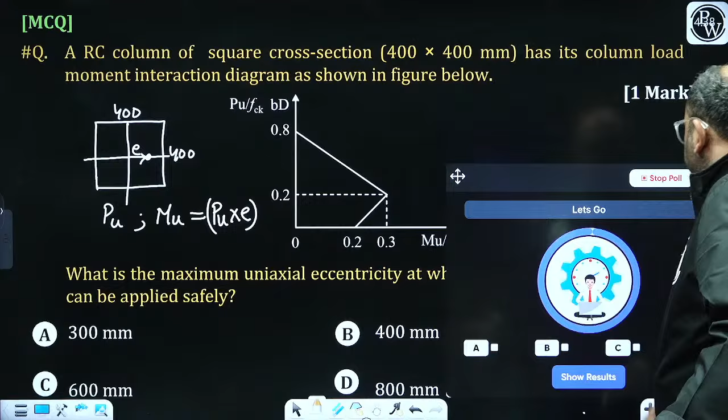So poll, I'm starting with you. It is a multiple choice question. I will be giving you 45 seconds to solve this question. Now the timer has started. Kindly give the answer of this.

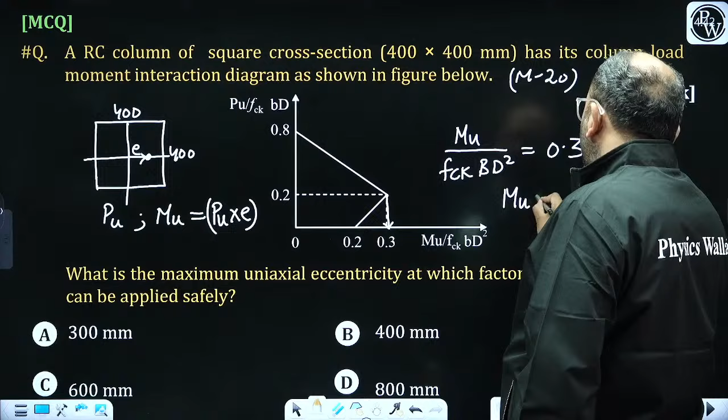Let's see this question. This is a concrete of M20 grade, that is why the answer is given like this, but definitely this has to be mentioned here. So based on this grade, the solution: when I talk about Mu divided by FCK BD square, then the answer is 0.3. So what is the value of Mu? This is 0.3. FCK is 20, B is 400, and D square is 400 square. So based on this, what is the answer coming?

Based on this, what is the answer coming? Anybody? Let me calculate: 0.3 into 20 into 400 into 400. Yeah, so it is coming out to be 384. Mu is coming out to be 384 kilonewton meter.

When we talk about this value, Pu divided by FCK into BD, this value is 0.2. So based on this, 0.2 into 20 into 400 into 400.

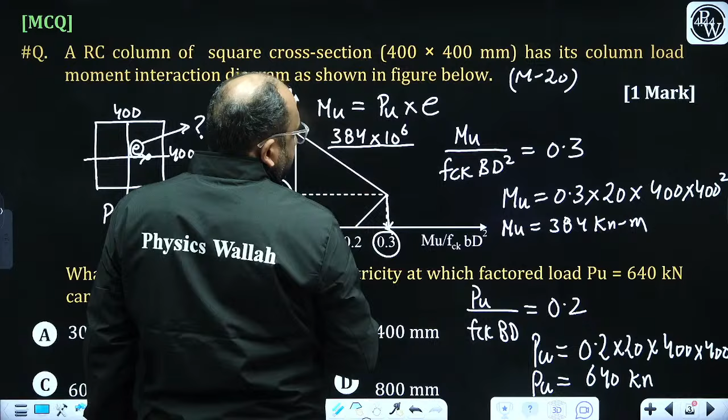Mu is defined as PU into E, correct? Mu value you know, it is 384 into 10 to the power 6, right? This is to be Newton mm, right?

What is the value of PU? This is 640 into 10 to the power 3. This is the value of E.

So the E value will be... E value kitni aayegi? Let's check. 10 ki power 6. Theek hai. So E aa gaya aapka 0.6 meter, that is 600 mm.

So what is the safe eccentricity at which the column is safe? The column is safe when the eccentricity is 600 mm. Are you getting it? Answer is C.

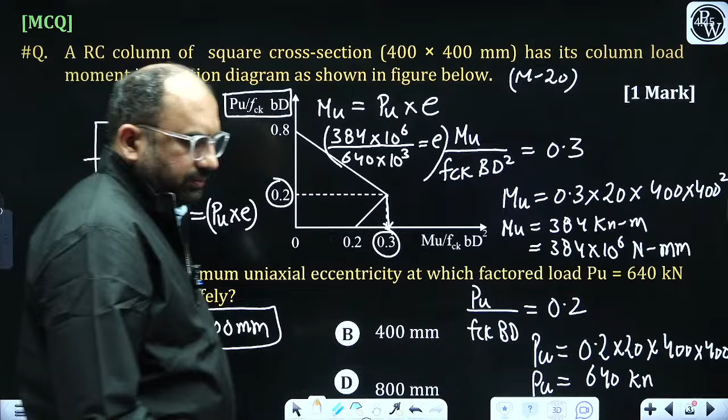Correct. Done. I hope this question is clear. Any doubt anybody is having?

This question is from the topic called column and eccentric load. You can read this topic, and this is by LSM.

So by LSM, when you're solving the question of column for the eccentric load, this is called the interaction curve. This is used, right?

Moving forward, again the MCQ based question. This is of 2 marks. So tell me what is the right answer for this? Tell me what is the answer for this?

So first of all, I would like to check how many people have given the right answer. So this answer was C, and 5 students answered correctly. Good. Now, what about this question?

This is a question regarding the longitudinal reinforcement of the column. Tell me what is the right answer for this? Giving you a time to solve this question.

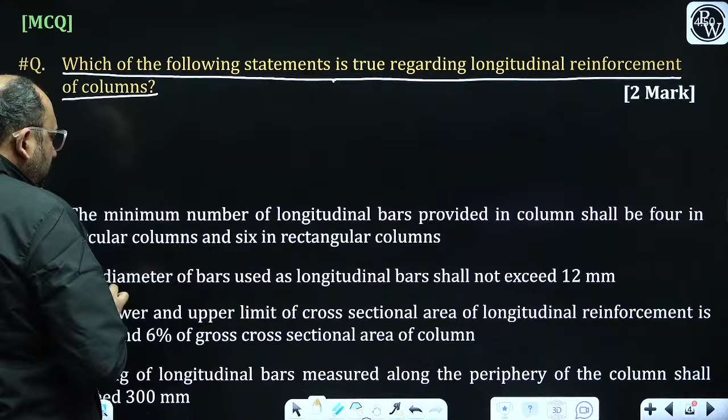Listen carefully. The minimum number of longitudinal bars provided in a column shall be 4 for the circular column, and it shall be 6 in a rectangular column.

So based on this question, the first option states that in a circular column, the recommendation says the minimum number of bars to be provided for the circular column should be 6, and for the rectangular or the square column it is minimum 4. So here in this question the option given is wrong. So therefore this one is wrong.

Based on the second option, the dia of the bar used as a longitudinal reinforcement shall not exceed 12 mm. But based on the recommendation, the dia of the main bar in a column should be equal to or greater than 12 mm. So this statement is again wrong.

Again wrong. Now the lower and the upper limit of the cross-sectional area of the longitudinal reinforcement is 0.8% and 6% of the gross sectional area of the column. What I say is this option is certainly correct.

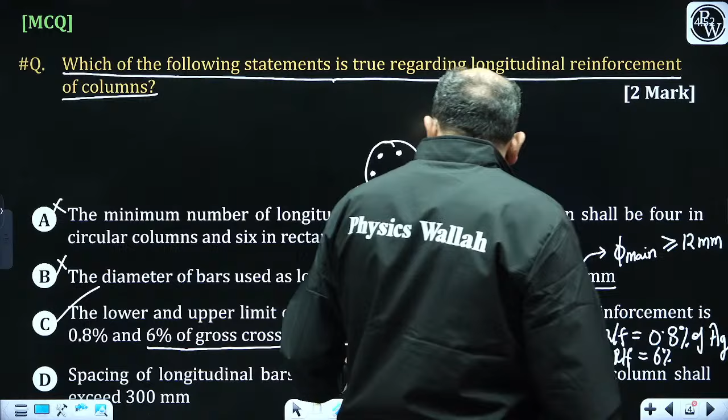So when the lapping is not provided in a steel reinforcement, then it is 6%. So certainly it's correct. The spacing of the longitudinal bars measured along the periphery of the column shall not exceed 300 mm. This is also correct. Right? This is also correct.

Now tell me, how many of you agree with me that option number D is correct or wrong? The first two options are incorrect. The third option is correct.

How many of you agree that the D option can be correct, or what you say, is it incorrect? Spacing of the longitudinal bar measured along the periphery of the column. So tell me, maximum spacing of the longitudinal reinforcement.

Not along the periphery - that measurement is wrong. So if this is a bar, the spacing between center to center of the bar is measured, not the periphery. Right? So this is maximum. Are you getting it? We are talking about center to center distance.

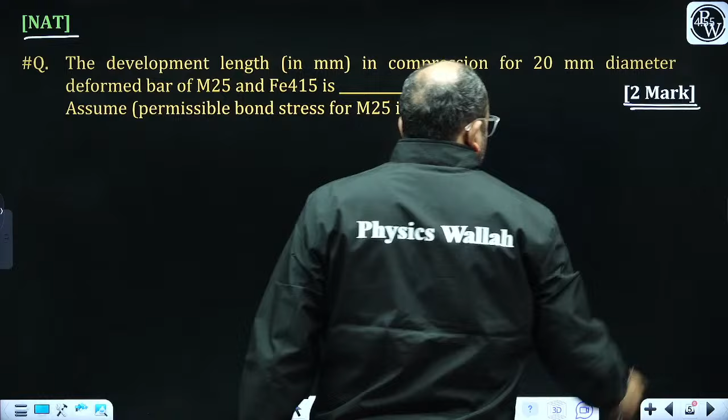It is a NAT based question, numerical ability test based question, again of 2 marks. So let's have a poll for this question. It is an integer type question. I'm giving you 60 seconds to solve this question. Kindly answer this.

Have you solved this question?

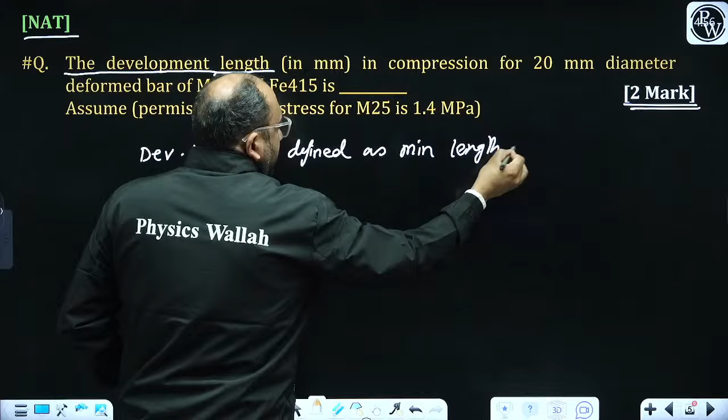So what do you mean by the development length? Development length is defined as the minimum length of steel embedded in column or in concrete, such that bond strength between steel and concrete is equal to tensile strength of steel. Correct? Is it?

So when we talk about the development length, what is the development length? After derivation, it comes out to be 4 into tau BD permissible. Is it? This is the formula for the development length. Are you getting it? Clear?

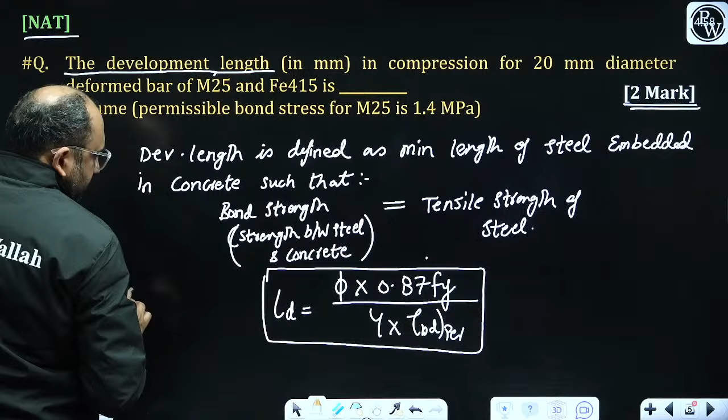So based on this formula, we need to check: the dia of the bar is given, find the development length in mm in compression for a 20 mm dia deformed bar. Listen, two notes are there. You need to consider that the tau BD permissible value is increased by 60% for HYSD and CTD bars, and this is available in these two grades, right?

Second is tau BD permissible value is increased by 25% for compression steel. Clear?

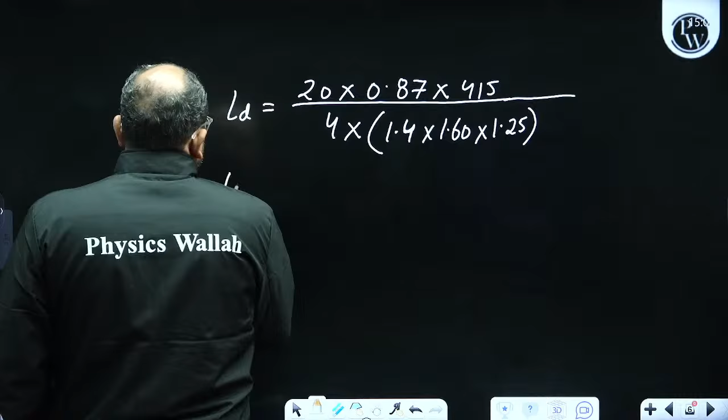Now this value has to be increased by 60% since the bar is HYSD, and since we are determining the development length for the steel in compression, the 25% is further increased for the compression steel. So based on these results, you can calculate the development length. This is coming out to be how much?

644.73 mm. This kind of question is very important. This is the answer. So here you can write 644.73 mm. I hope this is clear to everyone. Let me check how many people have given the right answer for this. So the answer is 644.73.

Okay, anyway, moving forward to this question. Now how many of you can give the answer for this? This is again an MCQ based 1 mark question: Take the Young's modulus of elasticity of steel given for Fe415 grade of steel. The ratio of compressive strain to tensile strain for the balanced singly reinforced section will be?

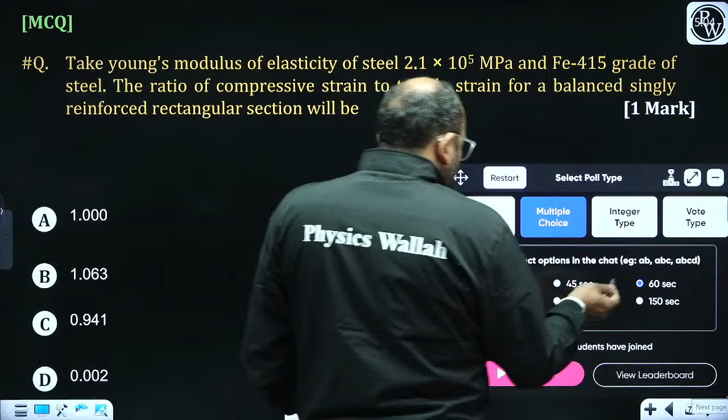So again I am starting the poll and you are supposed to answer. It is a multiple choice question. I'm giving you 60 seconds to solve this question. Kindly solve this. Give the answer.

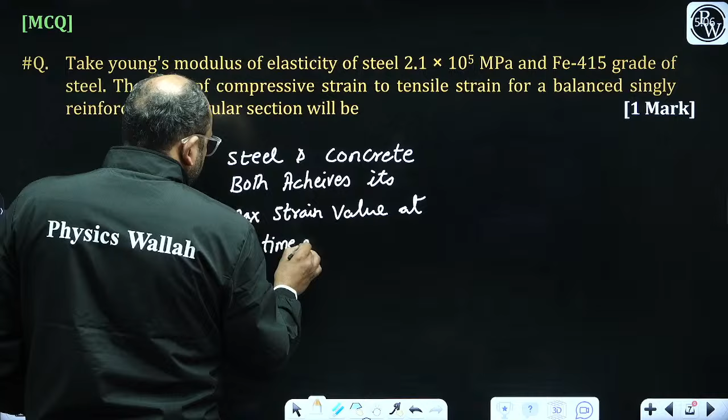Simultaneously, this happens when the beam is a balanced section, or I can say the limiting section. This happens in a limiting section.

So at the time of failure, the strain in steel is 0.87 Fy divided by Es. At the time of failure, the strain in steel has to be greater than this. So just before failure, the strain will be equal to this.

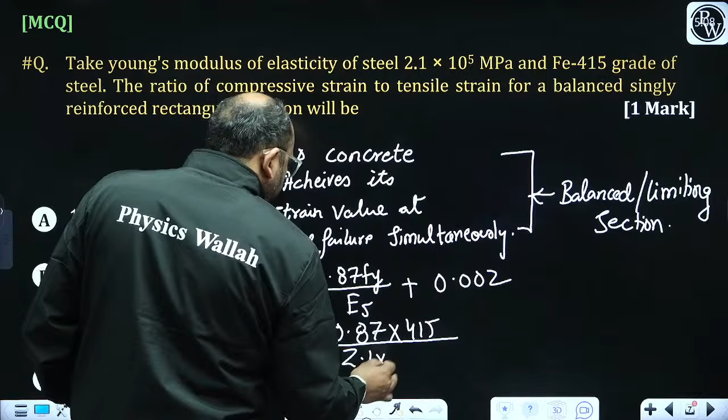So 0.87, what is the value of Fy here? It is 415. What is the value of Es here? It is 2.1 into 10 to the power 5, plus 0.002. What is the value coming out to be? Give the answer. It's 0.0037. Yeah, correct. Okay, great.

What is the strain in concrete? The maximum strain in concrete at the time of failure is 0.0035. In this question, they are asking the ratio of the compressive strain and the tensile strain. Obviously this is the compressive strain, because the concrete strain we are talking about is compressive strain, and the strain in steel is tensile strain.

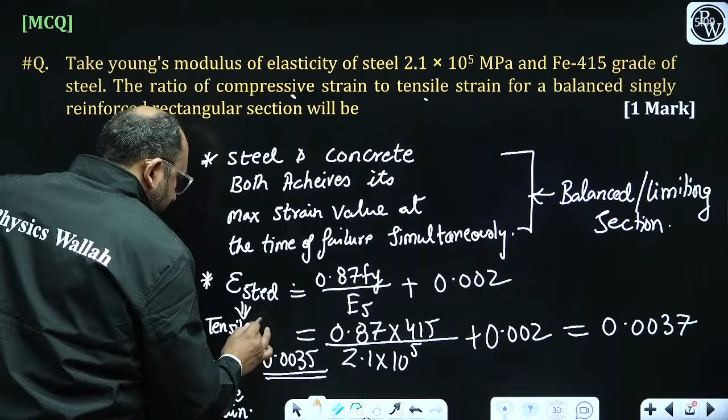So the ratio of compressive to tensile strain, right? So the ratio you can determine. What is the ratio of strain? The question is asking for E, and this is this. So 0.0037 divided by 0.00...

What is the value? Value is how much? 0.941. Is it the answer? Answer is C.

Tell me, is it clear or not? Is it clear or not? Swagatham, why are you saying it is? Okay, now correct. Yeah. Done.

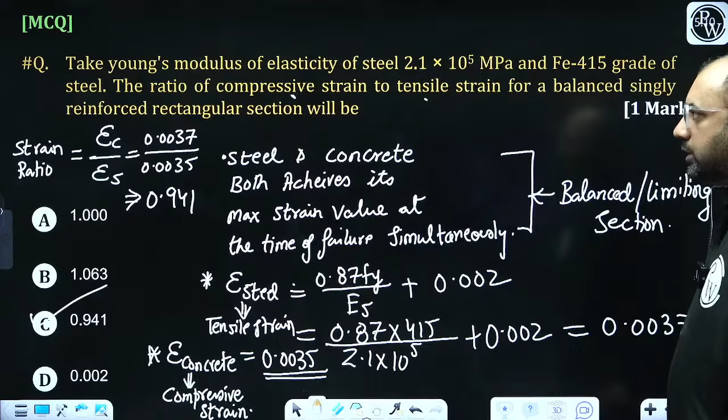Clear? This question I hope is clear to everyone. Good question, this type of question can be asked, so I will be writing it as an important kind of question. Again, the last question I solved is also important because many times this kind of question is asked.

So, okay, moving forward. Now this is a question in front of you. Again, it is an MCQ question, but this time this question is of 2 marks. You are supposed to answer this question. So first of all, yeah, it is a multiple choice question.

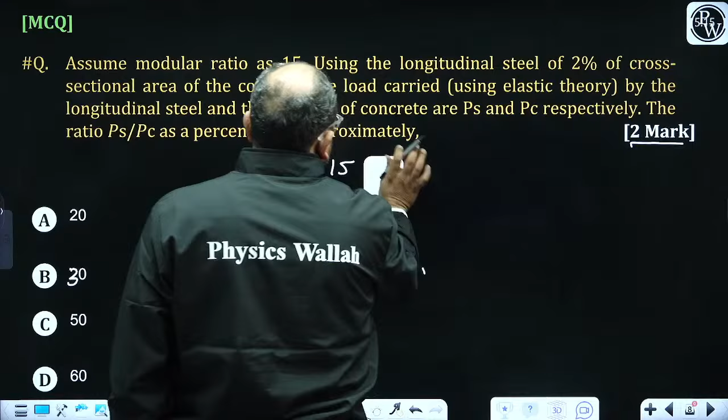Let me solve this question. So the question says assume modular ratio. You know what is modular ratio? This is 15. Young's modulus of elasticity ratio, right? It is given as 15, right? Now...

Considering the effect of creep, this modular ratio is defined as 280 divided by 3 sigma CBC, right? But it is not required because it is already given. That is why you don't need to have a sigma CBC value.

Now, okay, if you applied any load over the column, the column is made from two things. When you apply the load, the column is made from two things: one is steel, another is concrete. So when we talk about the column's total load, the total load is divided into steel load and concrete load. Some load is borne by the concrete, some by the steel. So load carried by the steel is represented as PS, load carried by the concrete is referred as PC.

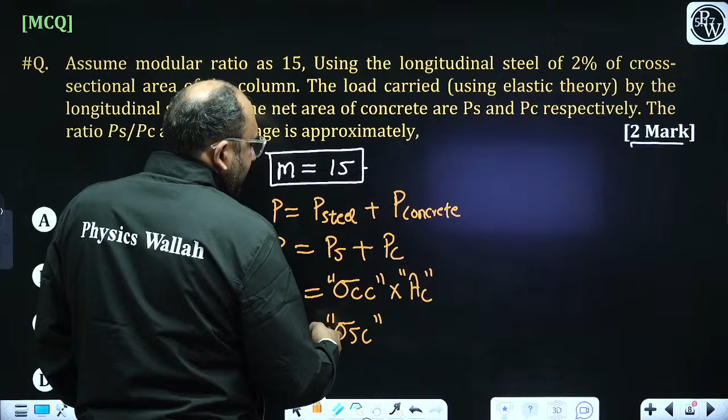Now, when we talk about the load carried by the concrete, it is the permissible stress in concrete in direct compression into the area of concrete in the section. And when we talk about the force carried by the steel, the permissible stress in steel in direct compression is referred as sigma SC into area of steel in compression.

So based on this, when we talk about using a longitudinal steel of 2%, as you can see, when we talk about the total area, the gross area, let's say it is B into D. I do not know the area given, but let's say the gross area is this, the gross area of the column. When we talk about the gross area of the column, out of the gross area, the area of steel is 2% of the cross-sectional area. 2% means, okay, done, so 2% of gross area, correct? So this is the area of steel.

So when we talk about the area of concrete, the area of concrete is the remaining area. So gross area minus 2% of the gross area is the area of steel, and the area of concrete is 0.98 into Ag, where Ag is the gross area. Moving forward, when we talk about sigma Cc into Ac, Ac is 0.98 into gross area.

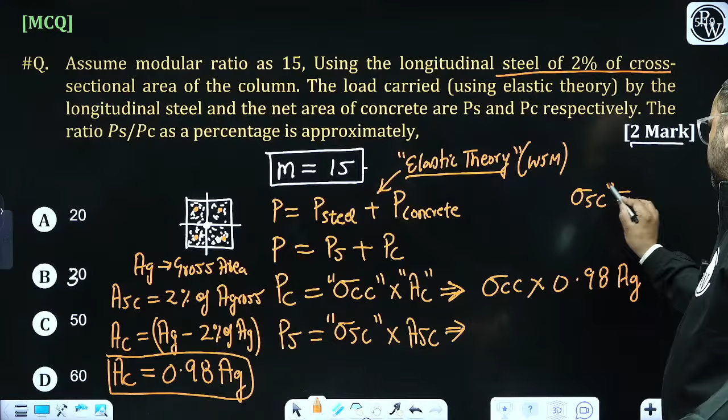This entire discussion is based on elastic theory, which is basically used in the WSM method. So the permissible stress in steel is m times sigma Cc. The stress in compression steel is equal to the stress in concrete in direct compression into the modular ratio. Based on this, I can write m sigma Cc, and here 0.02 Ag because it is 2%.

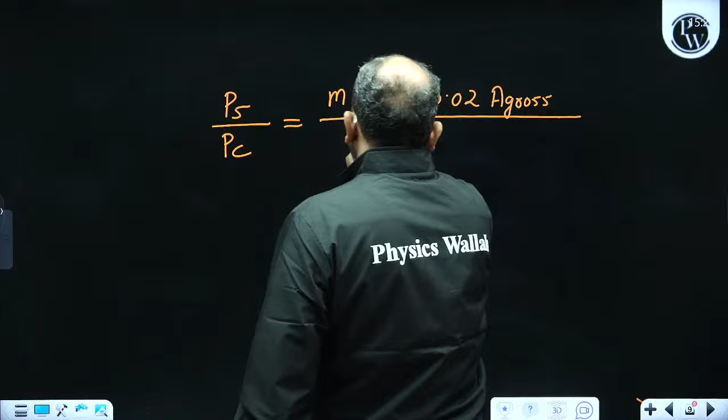So they are asking for the ratio of PS by PC. PS divided by PC equals m sigma Cc into 0.02 gross divided by sigma Cc into 0.98. The gross cancels out, this cancels out, and now you have m value. 15 into 0.02 divided by 0.98 - let me check - it comes out to be 0.3061.

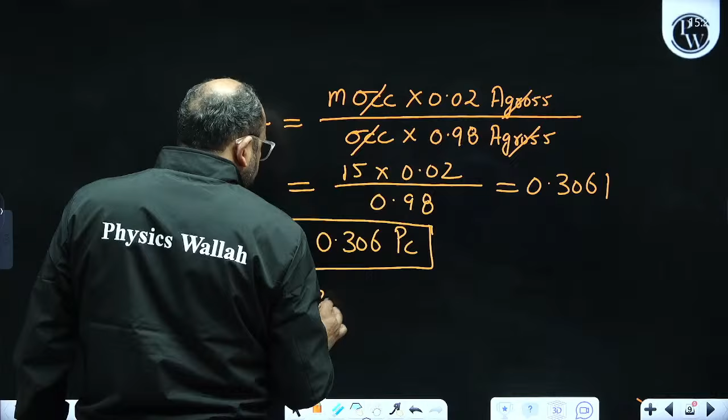So in percentage, the force carried by the steel is 0.306 of PC, or 30.6% of PC. So the answer is B. B is the right answer. This is a good question.

If there is an examination based on engineering services, this question is very important. But based on GATE examination, this can be important, but not that much, because this question is asked based on elastic theory, that is WSM. I cannot say they cannot ask, but the chances are less because most of the questions in GATE examination are based on limit state method. So I hope this question is clear to everyone.

Now moving forward to this question, again it is an MCQ based question, again of 2 marks. Now, okay, so this is being repeated. Is it repeated or what? No.

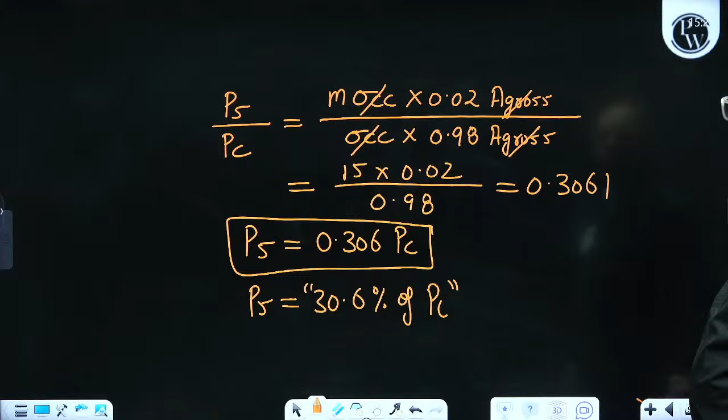Now coming to this question, this is a NAT based question again of 2 marks. It's an integer type question. So give the answer for this.

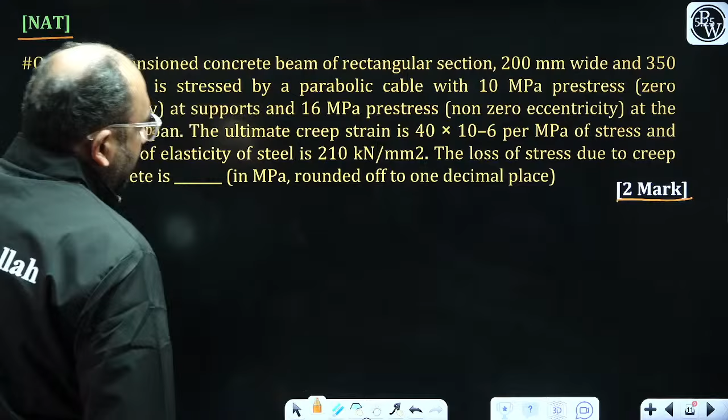A post tension concrete beam of rectangular section, 200 mm wide and 350 mm deep, is stressed by a parabolic cable with 10 Newton per mm square pre-stress at zero eccentricity at the support, and 16 Newton per mm square pre-stress at non-zero eccentricity at the center of the span. The ultimate creep is given, and the modulus of elasticity is given. The loss of stress due to creep in concrete is to be found.

Very good question, a good question, and I can say it is an important question also. This can be an important question. Please answer this. Give the answer for this question. Give the answer.

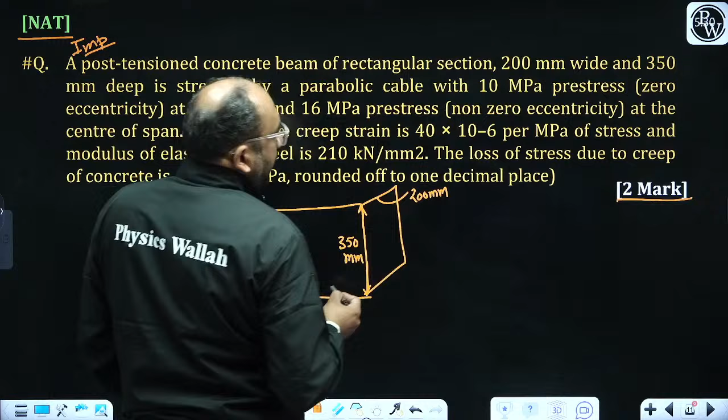Deep is stressed by a parabolic. Let's say this is the neutral axis. This is 350 mm, right? So where the eccentricity is 0, parabolic tendon is provided. So eccentricity is 0. And when we talk about the eccentricity 0 at the ends, but there is certain eccentricity at the center, it is given to us, right?

Okay. What is the question saying? The stress, the total stress, is P by A, right? And just the total stress, the load is not defined, right? Let's say here it is a load, whatever the load is there. So based on this, the total stress at this point is M by Z, right?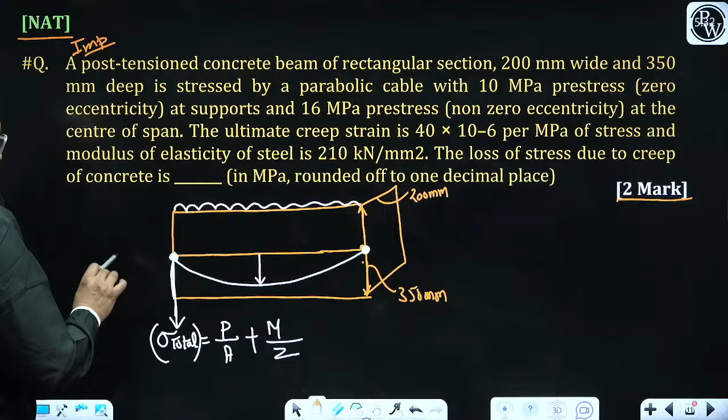So this is the total stress at the ends. The pre-stressing moment will be 0, but here at this section, that is at the center, this total stress is defined as P by A minus PE by Z plus M by Z, right? So here it is defined as this total stress value is 16 Newton per mm square, because it is talking about the MPa. MPa is Newton per mm square.

And when we talk about the stress at the center, at the level of steel, it is this. So at the level of steel, it's talking about now, sorry. So here it is minus, it is plus, it is minus. Okay, done.

So this is given to us. And at the end, again, the total stress at the level of steel is 10 Newton per mm square. So you know how these values come, right?

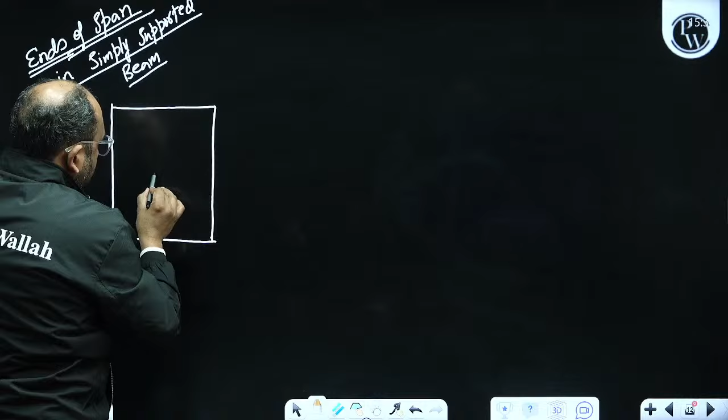So based on this question, you see, let's say it is a section and we are talking about the end, end span, in a simply supported beam. In simply supported beam, right? Now listen carefully. At the ends, the parabolic cables, the duct location is like this.

So the force is applied like this, and this is eccentricity 0, right? Right. So this is eccentricity 0.

Now see, the direct stress will be like this. Just a moment. Silent. Do not disturb. Okay, done. So direct stress is always P by A,

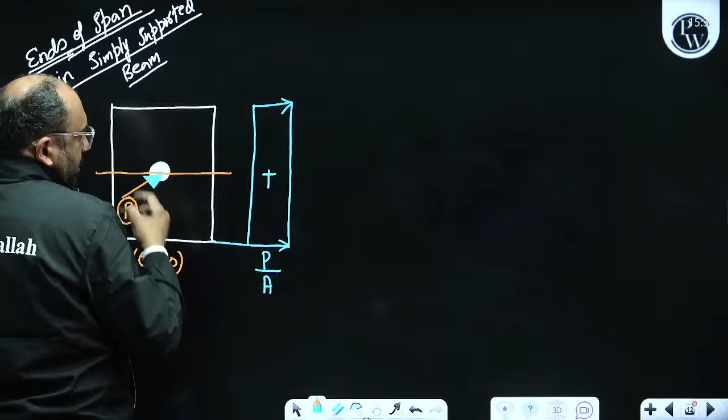right? The eccentricity is 0. So that means the P into E, the moment effect, that is P into E divided by Z, that is the bending stress due to pre-stressing moment. Here it is 0. And when we talk about the moment due to load, this is the moment due to external load, right? So this is compressive, this is tensile, this is compressive.

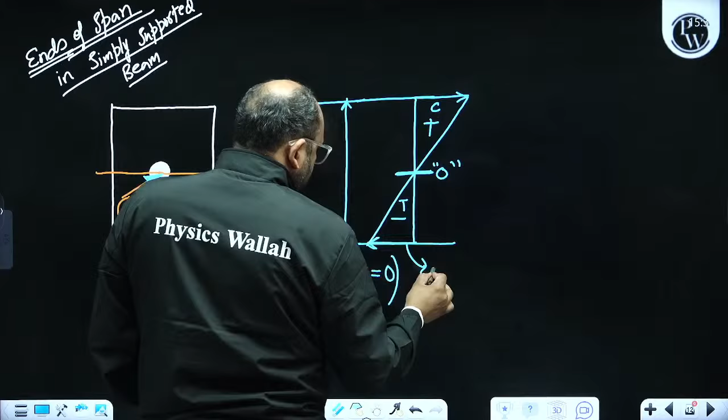This value is now C. At the level of steel, the stress is 0 because it is at a neutral axis, but at the bottom, the external moment stress is M by Z, right? So this is the scenario.

So when we talk about the stress at this fiber, what is the stress at the top fiber? So stress at the top fiber is defined as P by A plus 0 plus M by Z.

When we talk about the stress at the level of neutral axis, where the force is applied, so at the level of steel, stress at steel level, this is only P by A. This is 0. This is 0. And stress at steel level at the ends is only P by A, that is given as 10 Newton per mm square. This is given. Correct?

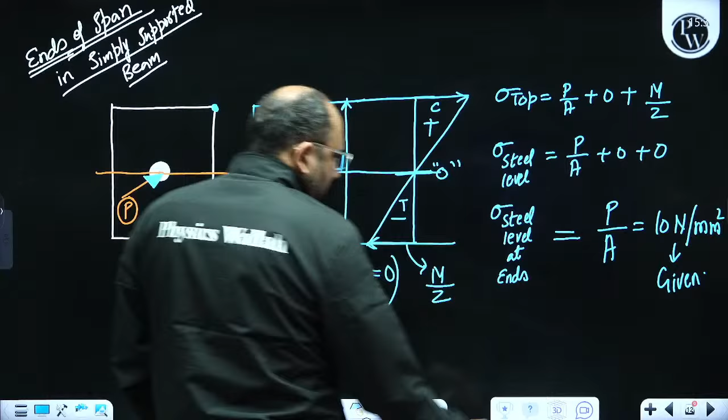Now, when we talk about the stress diagram at the midspan, this is the neutral axis, and in a midspan, the location of duct in a post-tension beam is here, right? So therefore, the force will be applied here. So this is P, this is E.

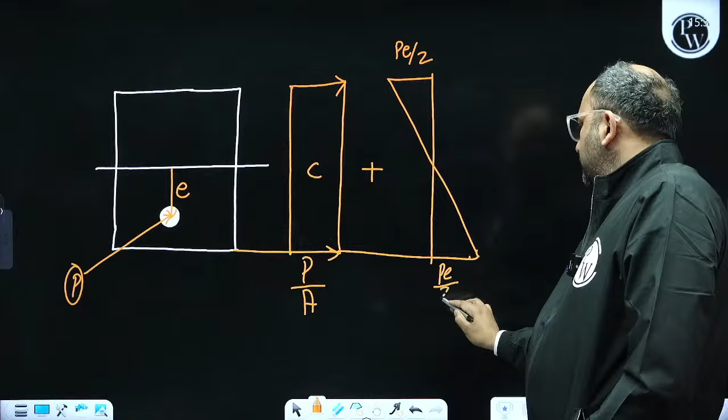So here the stress is compressive, that is direct stress P by A, then it is the bending stress like this, correct? So this is PE by Z, this is minus tensile, this is compressive plus.

Then what is the stress due to external load? At top fiber it is always compressive. At the bottom fiber it is always tensile. This is M by Z, this is M by Z.

Now see, what is the stress at the top fiber and the bottom fiber? Stress at top fiber is P by A, right? And this is PE by Z plus M by Z, correct? At the level of steel, let's check.

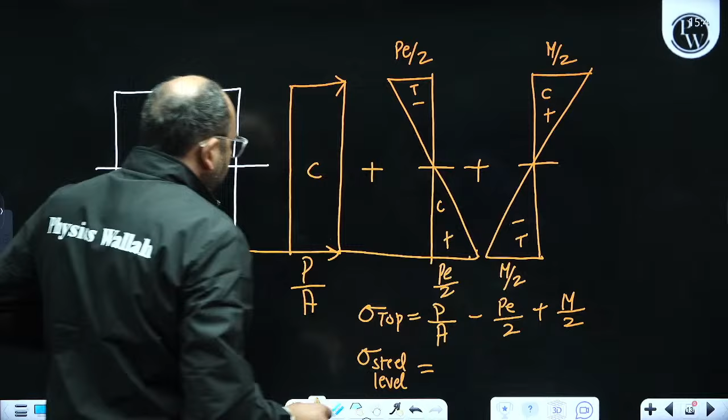At the level of steel, so at the level of steel, when we talk about the stress, the direct stress will be there, that is P by A, right? Now, here, at the level of steel, the value of Y bar is equal to E, so minus, plus.

And what is the stress at the bottom? In this case, I am talking about mid-span. What is the stress at the bottom?

Listen carefully. What is the value of this M by Z at the ends? This is going to be 0. Why is it 0? At the top fiber, at the ends, the stress is P by A only, because the simple support is there. At the simple support, the moment is 0. So that is why moment is 0, so this value is entirely 0.

So stress at the top fiber and stress at the level of steel, both are same. Now coming to here, when we talk about the stress at the bottom, this is P by A plus PE by Z minus M by Z.

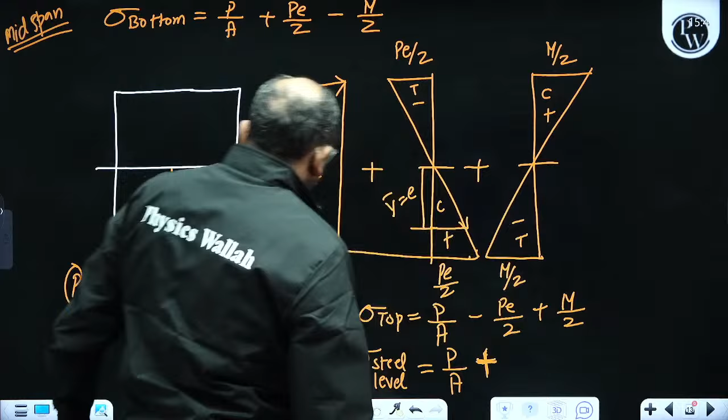So steel is just above the bottom. So steel location is this. So when you see the steel location, this value is PE into Y bar by I, correct? And the level of this is My bar upon I. At the level of steel, the Y bar value is always equal to E, correct?

And this stress is given to us as 16 Newton per mm square. In the question, you can see 10 and 16. What does it mean? Is it clear or not?

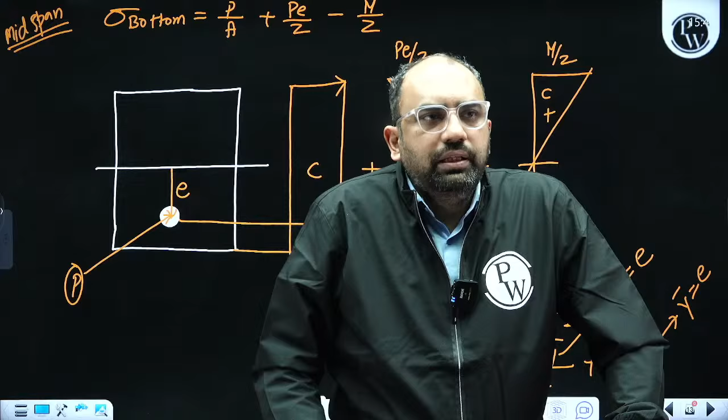What is not possible, beta? Please clear any doubt you are having.

So at the ends, this is a load. At the ends, the moment due to this load will be zero because it's a simply supported beam. That is why this moment is zero. And when the moment is zero, this entire term is zero.

So at the top fiber and at the bottom, what is the stress in this case? At the bottom, the stress is again the same. This is at the end. This value is given as 10 Newton per mm square. So stress at any level, if you see, the total stress is same at the top, same at the steel level, same at the bottom. And why is it? Because the moment is zero at ends.

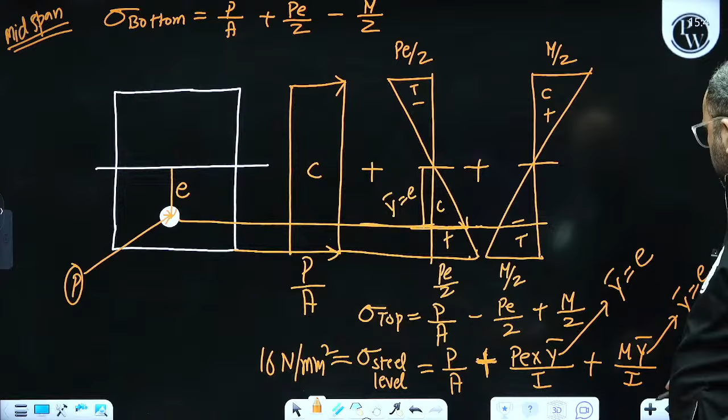But when we come to the mid span, the moment is not zero. Are you getting it or not? Is this clear or not? Beta, it's not difficult, I'm telling you, it's not difficult at all.

Right, I'm just clearing the concept. What is this 16 given? What is that 10 given? Although it is not required to be solved out, I'm just telling you why, because you should know the meaning of whatever value is given to you. That is why I've solved this entire thing in front of you.

What is this? This is called the analysis of a pre-stressed concrete beam. In a pre-stressed concrete beam, when we're talking about the post-tension beam, the post-tension beam has a stress diagram: direct stress, bending stress due to P into E. This is the bending stress diagram due to external load or external moment.

The external load moment is zero at the ends, that is why the stress is constant throughout the depth. So the total stress diagram, when you talk about it, is only this, that is P by A is the total stress at ends. At any level you can see. Correct? So is it clear or not?

So moving forward, stress is given to you. Is it clear or not, beta? You just see, is it clear? You just check. Done?

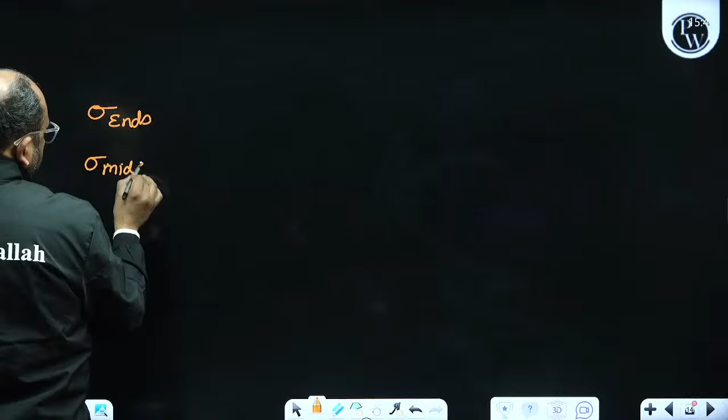Coming to the next, what is the stress at the ends, stress at the bottom, stress at the center, mid span? Stress at the ends: so end 1, this is end 2, and this is mid span, that is 3. This is given as 10 Newton per mm square. This is 10 Newton per mm square. This is given as 16 Newton per mm square.

So, when we talk about the stress diagram, it is like this. The stress at the center is 16 Newton per mm square. At the ends, it is 10 Newton per mm square. Now tell me, is it clear or not?

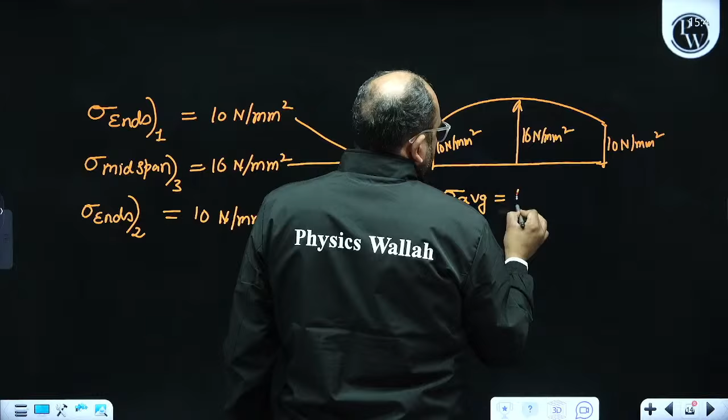So, what is the average stress in this case? The average stress is 10, this value, plus 2 by 3. The total peak is 16 and this peak is 10. So what is the average stress? This is going to be 6, into 2 divided by 3, that is 4. So this is going to be 14 Newton per mm square. So this is the average stress at the level of steel, irrespective of the end span and the mid span, is 14 Newton per mm square.

I hope this is clear to everyone. Tell me, clear?

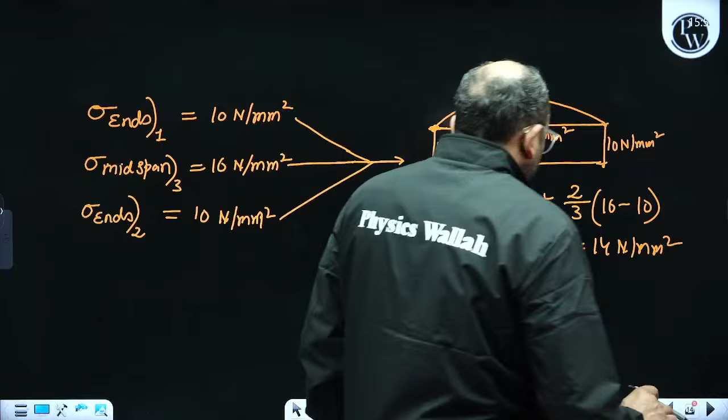Now, when we talk about the question, it is given as the ultimate creep strain is this. This is the creep strain value given to you. That is how much? 40 into 10 to the power 6. 10 to the power minus 6 is given to you. Okay, this is a strain. A strain has no unit. Clear?

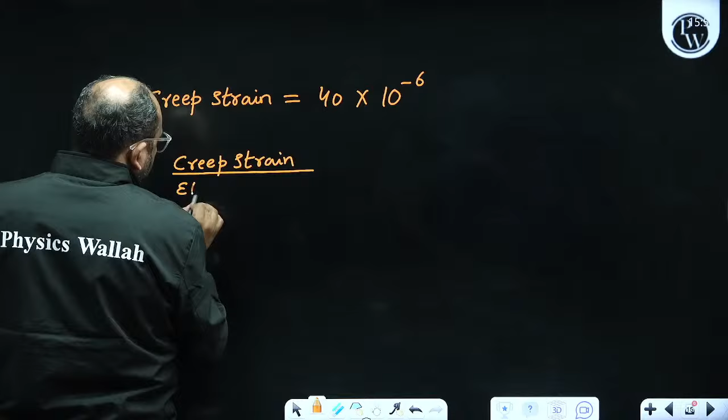When we talk about the creep strain, and when we talk about the elastic strain, this is referred as creep coefficient. What is called? Creep coefficient. Clear? Are you getting it or not?

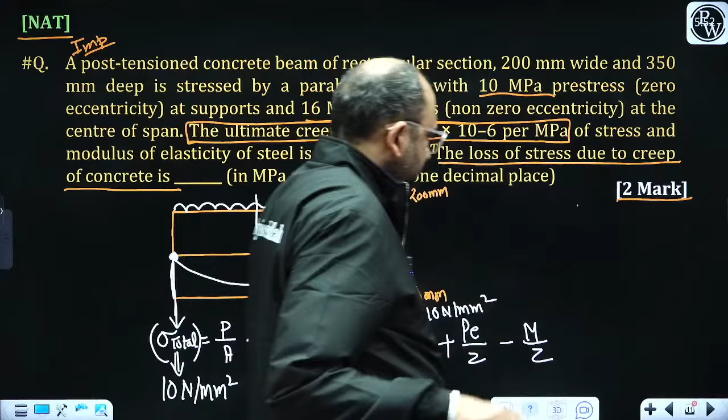So now tell me what is the ultimate creep strain. Let me check. The ultimate creep strain is given to you. Modulus of elasticity is given to you. The loss of stress due to creep of concrete is, tell me, what is the loss of stress due to creep? Okay, done. So, this is solved.

Stress by strain, and this I'm talking about steel, right? So, when we talk about the stress that we have calculated, that average stress is 14. 14 divided by ES is the elastic strain. How much it is? Let me check. It is going to be 14 divided by 2.1 into 10 to the power 5. So elastic strain value you got, right?

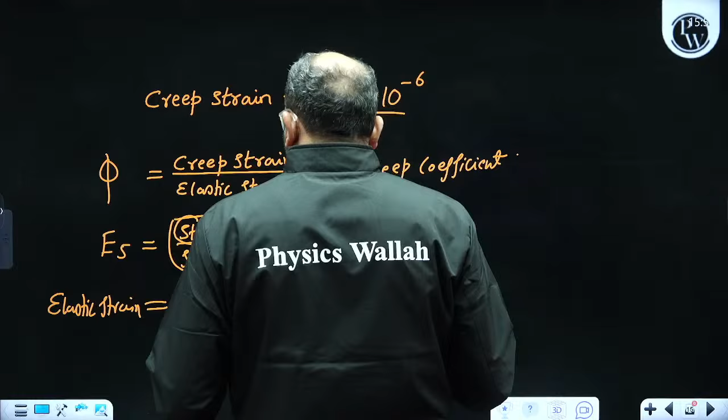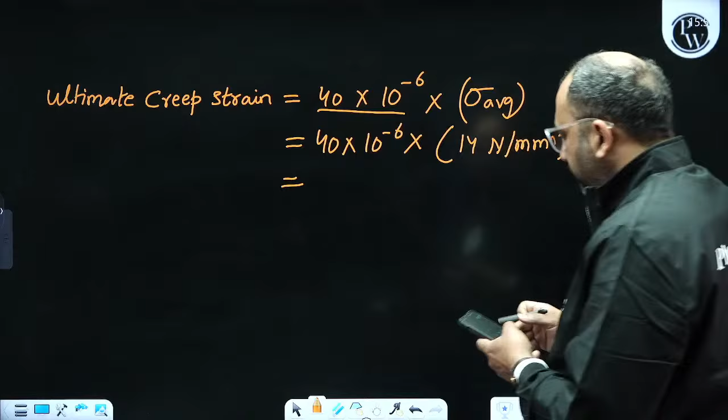So we need to know, listen carefully, listen carefully. So ultimate creep strain is of average stress basically. 10 to the power minus 6 average stress is 14 Newton per mm square. Now it is correct. So this is going to be how much? This is going to be 40 into 14. 40 into 14, this is 560 into 10 to the power minus 6. This is the strain. Got it.

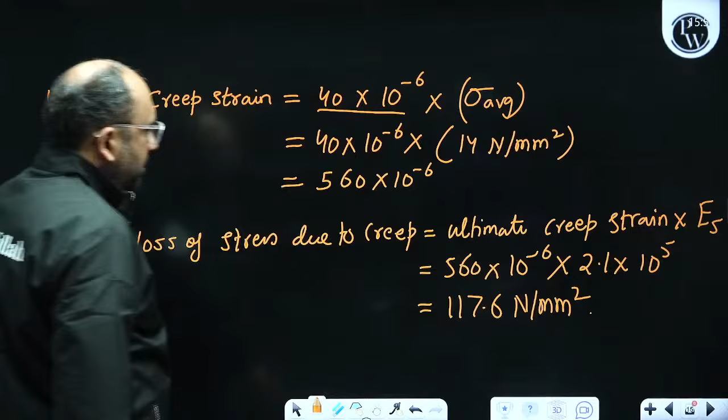So loss of stress due to creep is ultimate creep strain into ES. So this is ultimate creep strain into ES. ES is this. So this is going to be how much? This is going to be 560 into 2.1. It is going to be 117.6 Newton per mm square. This is the answer.

I hope this question is clear to you. The loss of stress due to creep is 117.6. MPa means, what is the meaning of MPa? It is Newton per mm square. So this is the correct answer. I hope this question is clear to everyone.

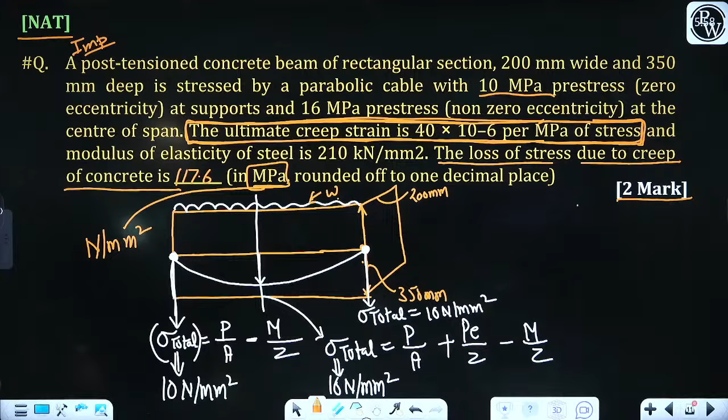Any doubt, please ask me. Earlier, what we have done, the mistake, that is in reading the question. Many times, when we read the question wrong, the solution will become wrong, right? So this is what I was considering the ultimate strain this only, but it is not this. This into stress, stress we have calculated. Average stress is 14 Newton per mm square that we have calculated. This is very important. This line is very important.

Clear? Done. Next question is this. This is a 1 marks question, MCQ based question. Now you need to answer this.

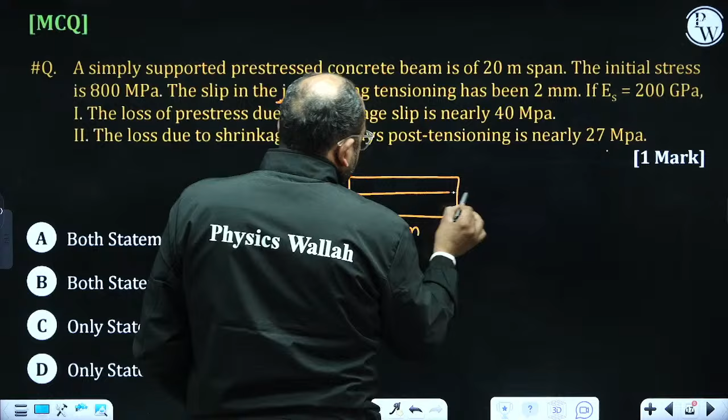The slip is, okay, let's say it is a steel reinforcement. This is being done with jacking. Jack can be applied at two ends or at one end depending upon the nature. So the slippage during anchorage is delta L, this much of steel. When you have stretched the steel, this much of steel has been released accidentally while anchoring. Anchoring means just to tie up the steel reinforcement with the jack. So some steel has been released, some deformation has been released. So deformation released during anchorage. Anchorage means tying the steel reinforcement with jack.

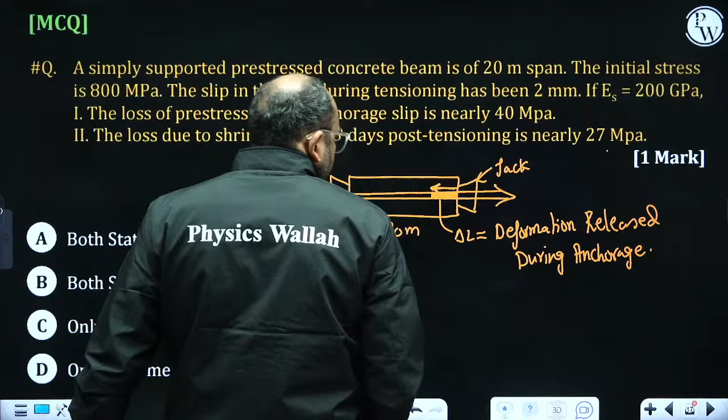And this is how much? This is 2 mm, correct? So therefore, loss of strain in steel reinforcement is 2 mm divided by total length of the steel, that is 20 meter. So when you convert this, so what is the strain? What is the strain coming out to be? The strain is coming out to be how much?

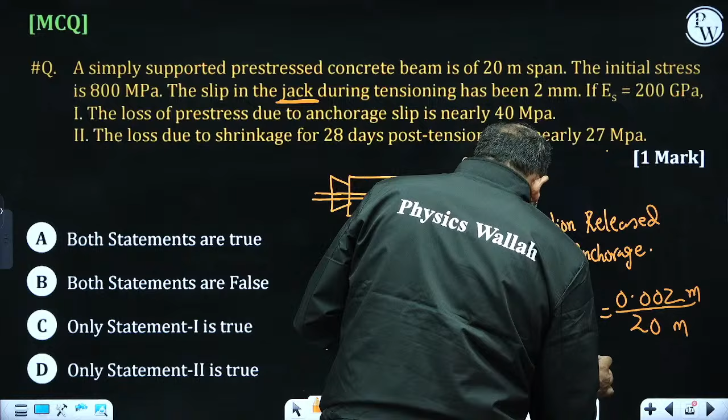Strain is, okay, this is the strain. Now therefore, when we talk about the loss of stress in steel, right. So just a moment. This is a calculation, that is 2 meter or 2 mm. Okay, done. Divided by 20. This is 0.0001, right, into ES. ES is how much? 2.1 into 10 to the power 5, so this is going to be, this is given as 2, okay? So it is 2 into 10 to the power 5, okay?

So solving this, 0.0001 into 2 into 10 to the power 5, this is coming out to be 20 Newton per mm square, correct? This is coming out to be 20 Newton per mm square. So the loss of stress due to anchorage slip is nearly 40 Newton per mm square. This statement is wrong.

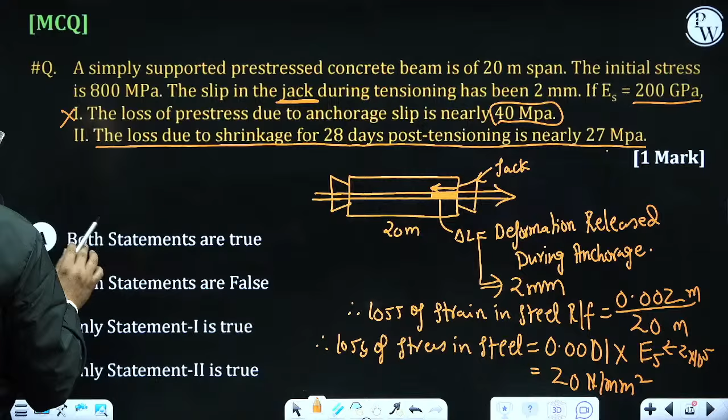Now, second statement, let me check. The loss due to shrinkage of 28 days post-tensioning is nearly this. So first statement is wrong. If the first statement is wrong, so what does it mean? Both statements are true - this can't be correct. Only statement 1 is true - this is not correct at all. Both statements are false - we need to check this, right? Only statement 2 is true - we need to check this.

So loss of stress due to shrinkage. Loss of stress due to shrinkage, right? And we are talking about the loss of stress due to shrinkage in what? Tell me, we are talking about the loss in post-tension beam. This is the value. Loss of stress due to shrinkage in post-tension beam is defined as this. Is it or not?

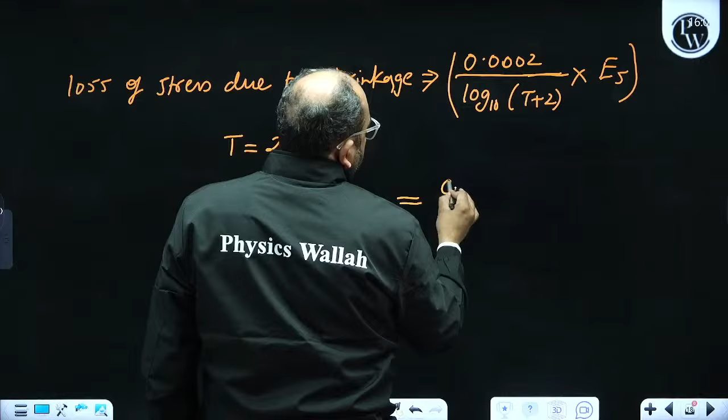0.0002 divided by log 10 t plus 2. What is t here? In this question, the t is 28 days, right? So 28 days, correct? So what is this? 0.0002, log 10 t is 28 plus 2, into what is E? ES is 2 into 10 to the power 5. So what is the value coming out to be?

Now let's calculate. Let us calculate. So it is going to be log. Where is the log? Log. Okay, log 30. So this is coming out to be 27.04 Newton per mm square. Correct? So what is the answer? It is 27. Okay, nearly same. So I can say this statement is true. So only statement second is true. Answer is D. Answer is D.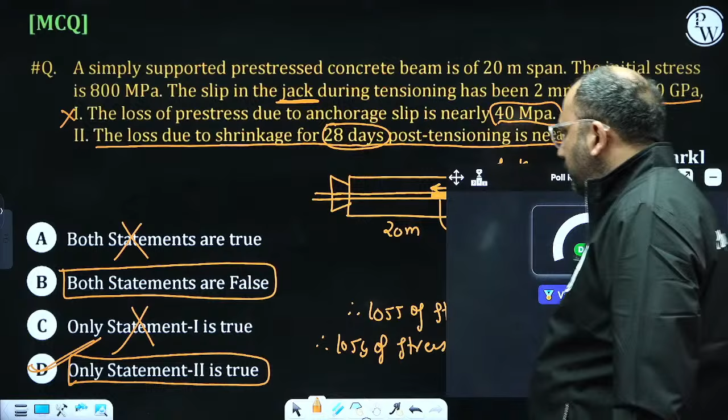Let me check how many of you have given the right answer. How many of you have given the right answer? 0. What is this? What is this, beta? Nobody is answering right. Your, I think, pre-stress concrete portion is weak. If you people are not able to answer these questions, very simple questions, then that means your pre-stress concrete portion is weak.

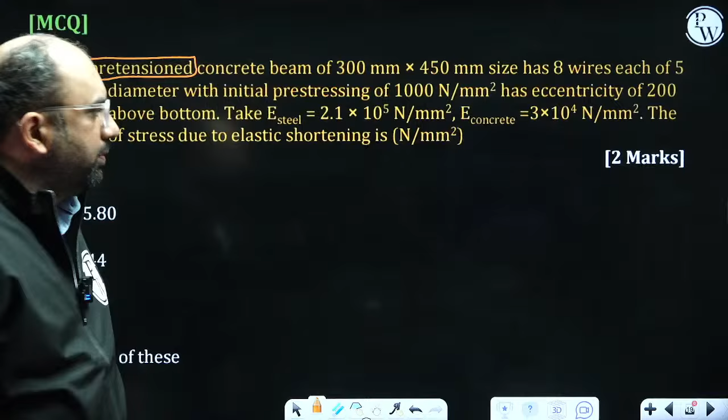So loss of stress due to elastic shortening, they are asking you. How many of you can calculate? I'm giving you time to solve this question. Please give me the right solution for this question. Okay, multiple choice, start. Give the answer.

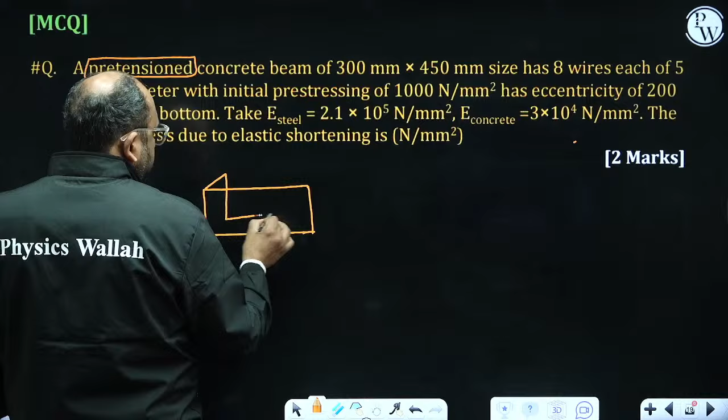Okay, so let's take this question. It is a pre-tension beam, this beam is given to you. The size of the section is also given, that is 300 and 450. So this is a beam given to you.

Has 8 wires, each of 5 mm dia. So this is a steel reinforcement provided throughout. Now it is being asked that from the bottom it is 200 mm.

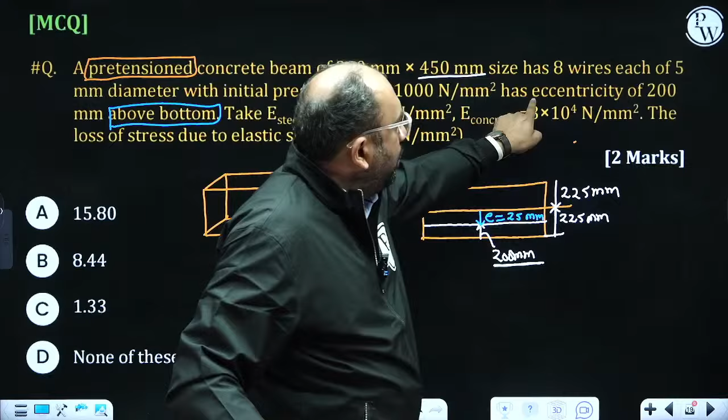So this depth of neutral axis is 225 mm, and the total depth is 450 mm. Out of 450 mm depth, from the bottom it is at 200 mm. So from the neutral axis, what is the eccentricity? From neutral axis point of view, the eccentricity with respect to neutral axis is going to be 25 mm. So from bottom, above bottom, it is 200 mm. Therefore the eccentricity will not be 200 mm, eccentricity of 200 mm above bottom.

So whatever the eccentricity, it is with respect to steel provision above bottom, that is 200 mm. So from the bottom the steel is provided at 200 mm, therefore the eccentricity is 25. Okay, so loss of stress due to elastic shortening is defined as the modular ratio into stress in concrete.

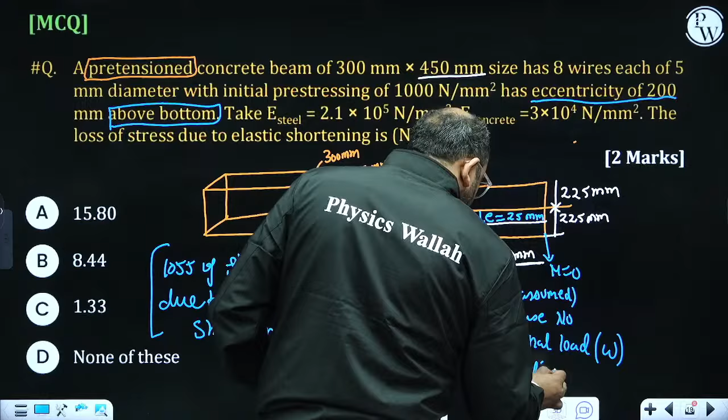And when we talk about the stress in concrete, this is the average stress in concrete. When we talk about the moment, it is 0 here and here, and the moment is assumed 0. Why? Because no external load is defined. So at mid-span, the moment is also assumed 0.

So the stress, whatever stress you are having here, there is an eccentricity. So let's check it down. This is a section. This is 300, this is 450 mm, this is 300 mm. The steel reinforcement is here.

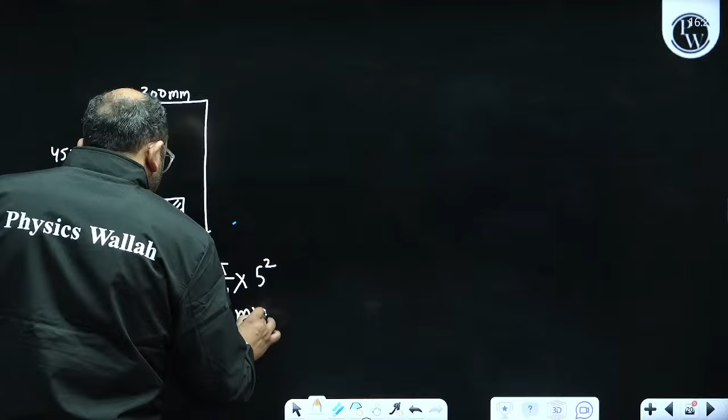This is composed of 8 wires of 5 mm dia. So what is the area of steel? Area of steel will be 0.785 into 5 into 5 into 8. This is going to be 157 mm square.

Now when we talk about the eccentricity, this is 25 mm. So when the pre-stressing force is acting here, there will be a direct stress like this. This is compressive, this is P by A, here also it is P by A. But due to eccentricity, there will be a moment, and the moment introduced will be anti-clockwise, and this anti-clockwise moment will create the beam hogging.

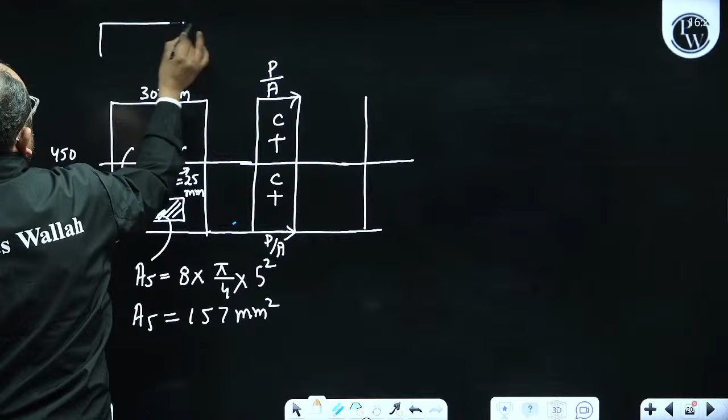The beam will hog like this. Let's say this is a beam, we are talking at this location. So the moment created here is P into E, and P into E here. So the beam shape will be like this, there will be a hogging. So there will be tension above and compression at the bottom, and tension is negative, compression is positive. So here it is like this.

So tension is negative, compression is positive. This is PE into Y bar, this is PE into Y bar upon I, correct? So at the level of steel, when we talk, the Y bar again will be E.

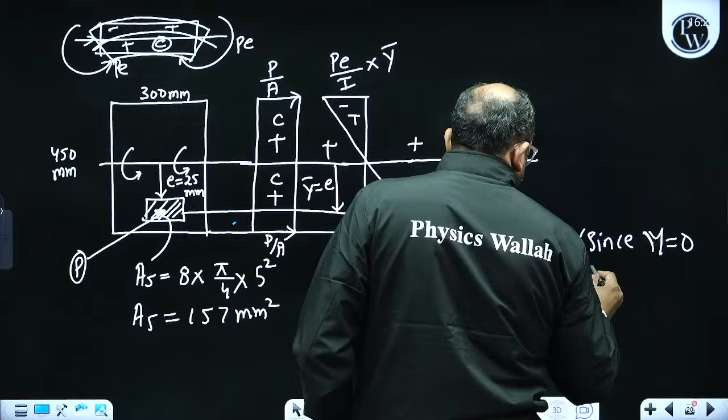The moment is assumed to be 0. So M into y bar upon I is 0. Since M is 0, no load is given in the question.

So therefore, the total stress at the top, at the level of steel, stress at the level of steel will be P by A, then plus PE into this, right? At the level of steel, this is now the stress at the end, at mid span.

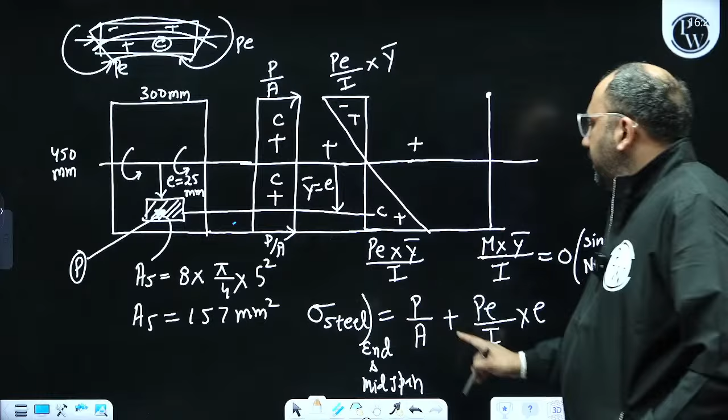This is same because the location of steel at both the location, at the ends and at the midspan, it is same. When the steel location is same at the midspan and at the ends, the internal stresses due to pre-stressing force will be the direct stress and the bending stress. The combination of these two stresses is called the internal stress, and that internal stress is called initial pre-stress, which can be calculated easily, right?

Now we are saying what is the value of P? Stress is given, right? So when we talk about this P, this is going to be stress in steel into area of steel. Stress is 1000 given to us. Area is 157. So the answer is going to be...

This is 1000 given to you and this is 157. So this is going to be 157,000, right? So this is Newton, correct? This is the force.

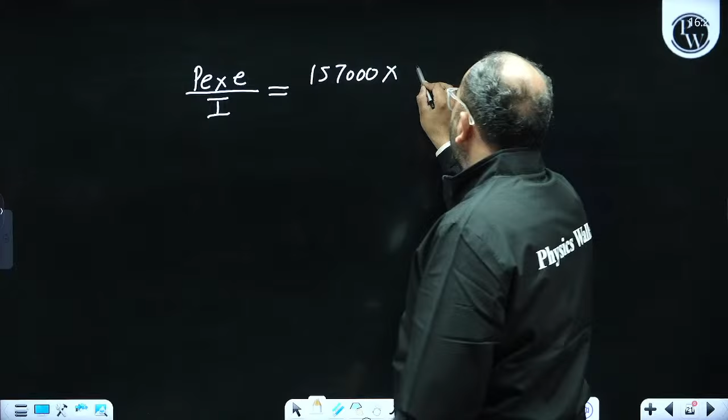Right? You can calculate. And more likely, what is the value of P into E divided by I? So it is 157000. This E value is 25 square. What is B? I, B D cube by 12. This is the moment of inertia of a rectangular section.

This is called bending stress due to pre-stressing force, eccentricity. Bending stress due to pre-stressing force, eccentricity, correct? So this is second. So stress in concrete is defined as this.

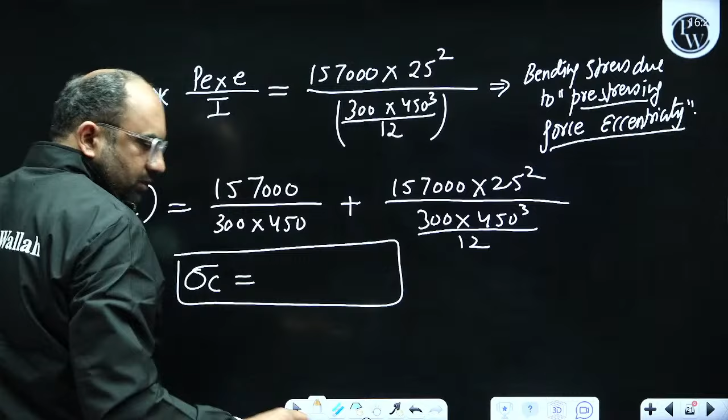Below neutral axis, it is plus. Correct? What is sigma C? Can you calculate? What is the value of sigma C? Sigma C will be... not 8, it is 1.20.

Okay, done. So solve it. It is going to be 1.206, right? Okay, done.

Now, what is the modular loss of stress due to elastic shortening? This is going to be m into sigma c. What is the value of m? Es by EC, and sigma c is 1.206. This we have calculated. So what is this? What is this value given?

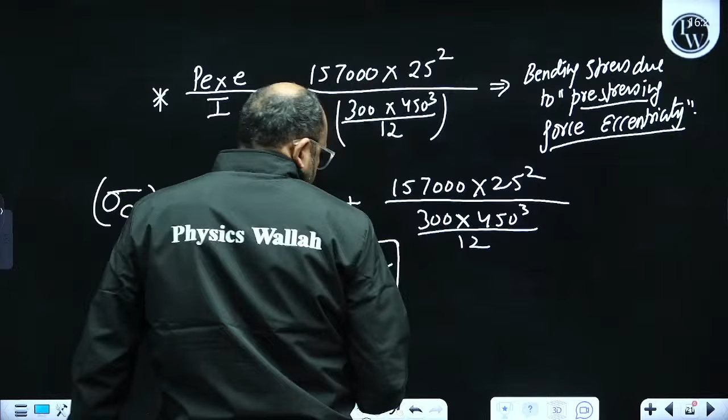It is 2.1 into 10 to the power 5. This is 3 into 10 to the power 4. So what is the value coming out to be? This value is coming out to be 8.44. Clear? This is nothing but MPa, megapascal. So 8.44 is the right answer.

I hope this question is clear to everyone. Any doubt? Any doubt? Any doubt? Okay, done.